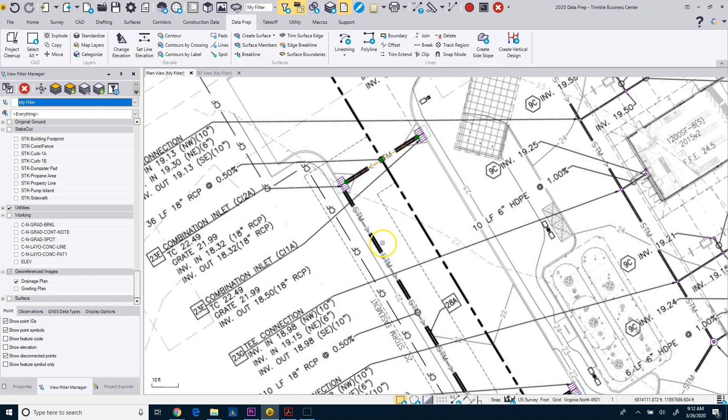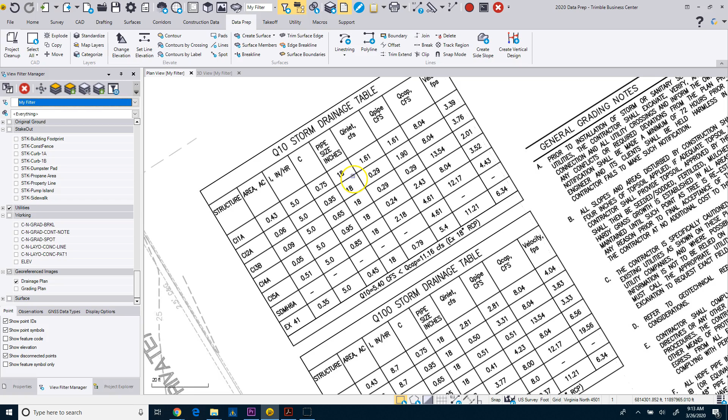All right, so I want to show you another feature. So just like I elevated my curb line, I could elevate these pipes, but let me see here. I think this is all 18-inch storm pipe RCP. So if I look at my note and we come down here, there's my table here, you see, yep, it's all 18-inch. So there's my storm drain table, pipe size all 18-inch, and that's fine.

So what I'm going to do is I'm just going to go to CAD, line string, and I'm going to call this 18-inch RCP. And we're going to put it on that same layer as our pipes. So we're going to go up to our stakeout under storm pipe. And we'll keep all that the way it is, and I'll click apply. So now it's asking me for my coordinate, and you can see it's giving me a bunch of snaps.

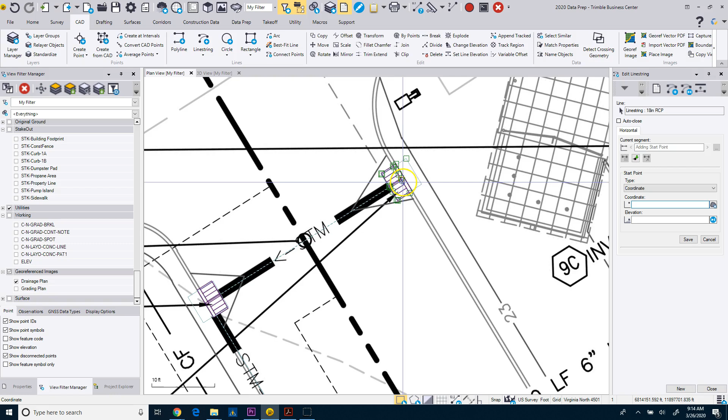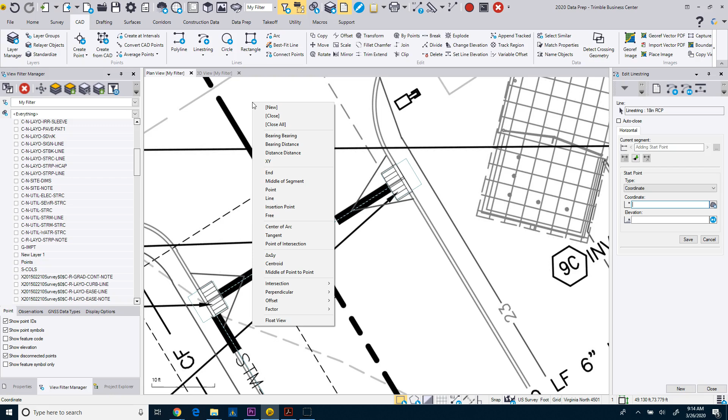To help with that, I'm going to turn off these layers that I don't need anymore. Okay. That gives me a few less snaps, but I want the center of this structure. So all I have to do is right click and select the centroid. By doing that, when I pick that object, you can see that it puts that little marker at the center of this square. So I'm going to pick that. It assigns the elevation to the rim.

So in this case I'm going to cancel, and I'm going to change this to the invert out for this structure, which is 18.50. So I'm going to hit that. Then I'm going to add the next segment, or after last segment, and I'm going to toggle off the elevation auto advance.

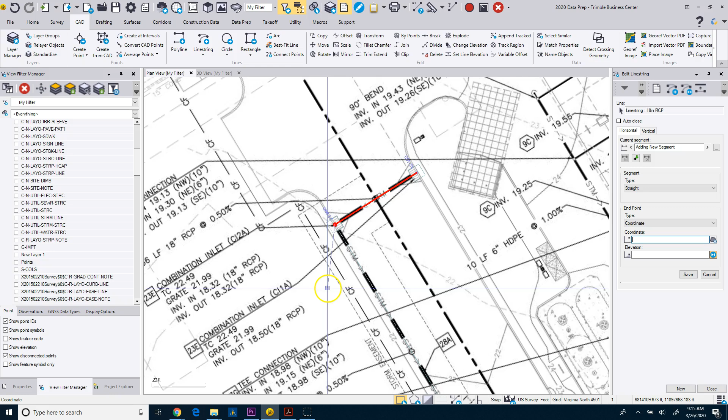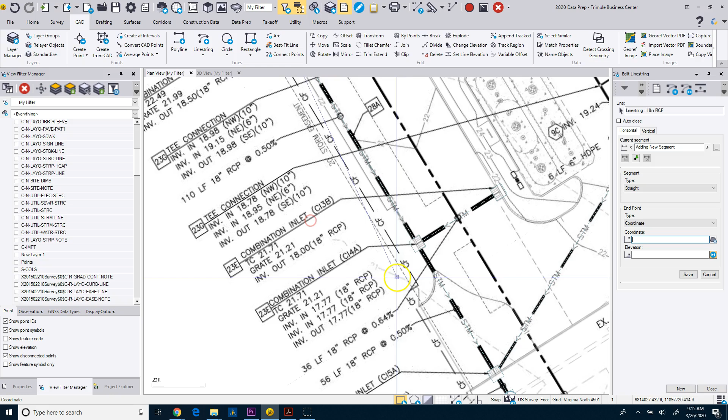I'm going to right click, centroid, pick this object, and oops, I must have hit that already, so let me cancel that. And this invert here, 18.32. I'm going to put that there. And then I'm going to add the next one. Okay. Make sure that's off. I'm gonna hit the centroid of that. It picks up the elevation because it's snapping to the center of this object. So I have to hit cancel on these and make that 17.77.

And then we'll just continue. Add another one. Centroid of that object. Hit cancel. And again, just make this... my invert in is 17.49, so that's the bottom, 17.49. And then add after, right click, centroid of that.

And because I didn't elevate that square, and I picked the center of the square, while I actually elevated the circle, now it's prompting me for an elevation here. So I'm going to put in the elevation of 17.37. So now if I look at my 3D view, I've got my structures and I've got my pipe.

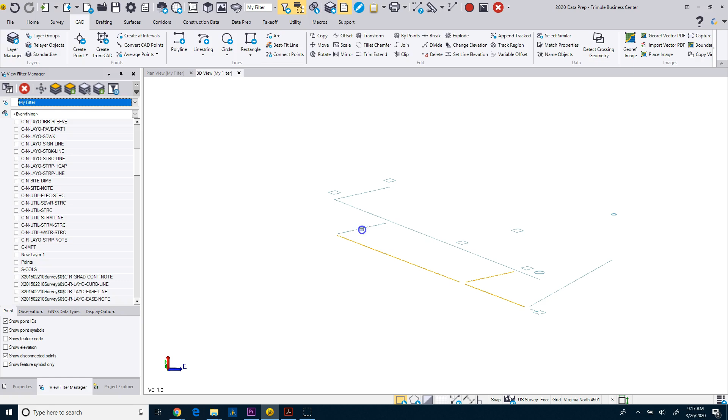So what I'm going to do here is remove these and simply delete them because I don't need those. I just want the one, and I don't need this. I'm going to delete that as well. Okay. Now I'm going to leave that one because I may need it later, but really just looking at this main storm run.

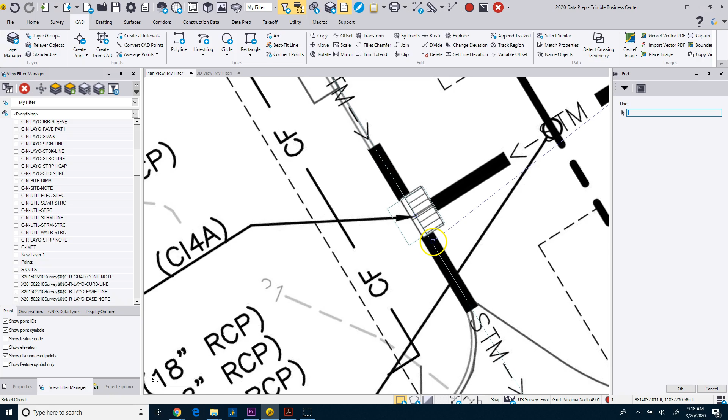Now I can also add my line string for my other run here, which is going to be the centroid of this one. Cancel. I'm going to make that out 18. And then I'm going to come in here, and instead of going to centroid, I'm just going to right click and do end, and you can see that I'm snapping to the end of that line. And then that one should pick up 17.77, which if I cancel, you can see that it does. Okay. So now I've got my line work.

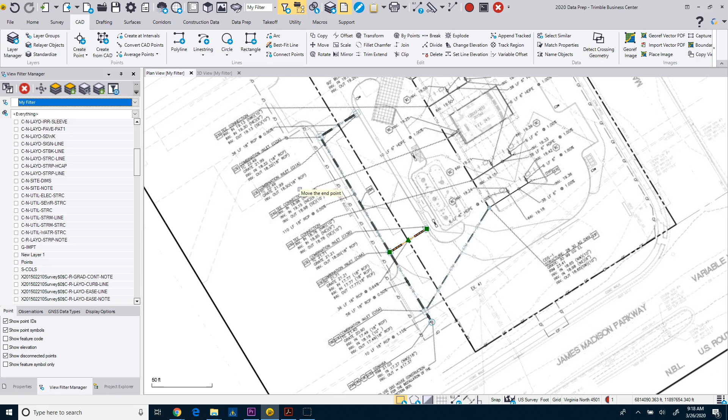Now what I'm going to show you next is how to set points so that you could use points to stake out this utility run, or you could use the line and the objects to stake out the utility run. But I want to show you how you can set points fairly quickly, which is why I'm doing this for instructional purposes.